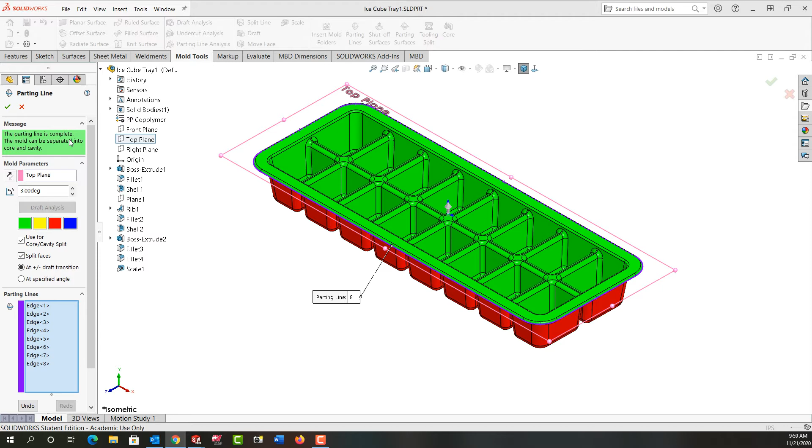Enabling the split faces will let SOLIDWORKS automatically split any straddle faces found during the draft analysis. So when we do this, it finds all these edges and it creates our parting line as we've seen before. So I'm going to say OK. We can now see our parting line shown in blue around the edge of the ice cube tray.

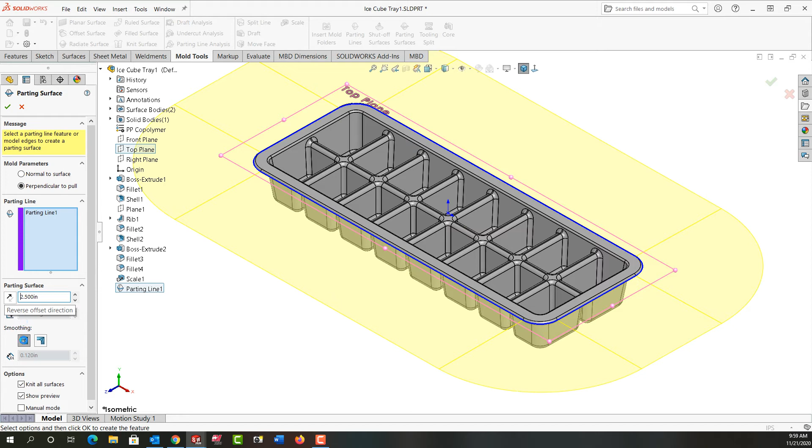And next, with the parting line highlighted, I'm going to come up here and tell it I want to make my parting surface. So it's going to grab that. I'm going to keep it perpendicular to the pull. I'm going to make it 2.5 inches with the corner sharp. I'll tell it to knit all the surfaces, and again I'll click OK.

Next, I want to insert the tooling split. So with the parting surface highlighted, I'm going to come up here and tell it I want to make a tooling split. I'll reselect this sketch. I'm going to look normal to it. I'm going to sketch a center point rectangle from the center here out.

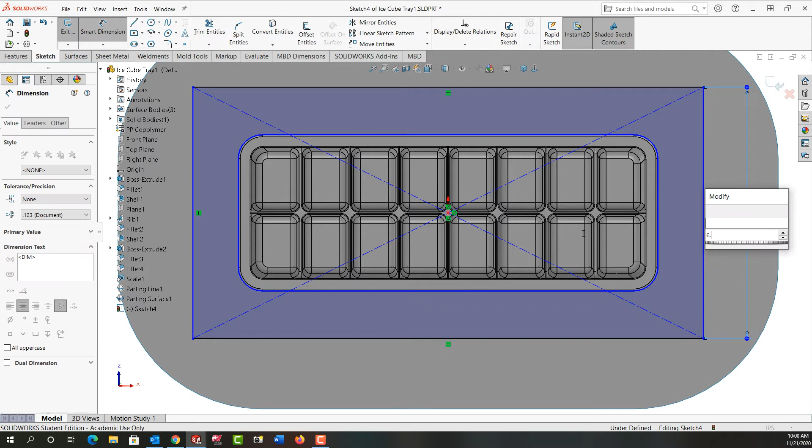We'll use mouse gestures to activate dimensioning. We'll make this side 6 inches. Zoom out a bit, just a bit more so it all fits, and I'll make this side 12 inches. And again, when making that parting surface, it just needs to be larger than whatever the rectangle for our tooling split block will be. We'll go back into the isometric view and exit the sketch.

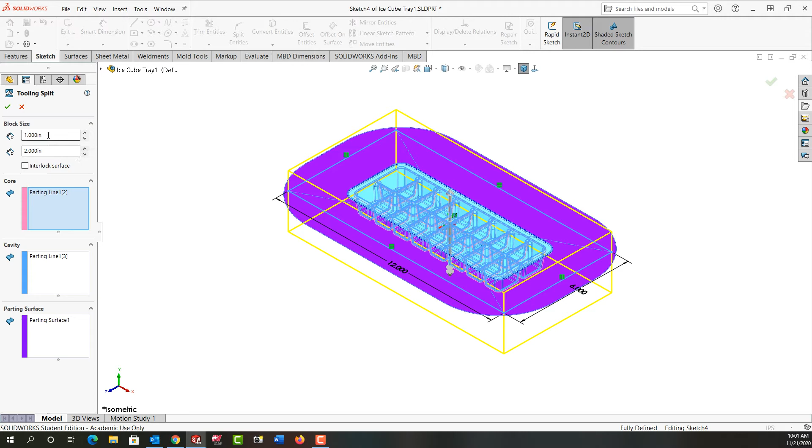I'm going to make the top block 1 inch and the bottom block 2, and I'm going to say OK. So next, I no longer need to see my surfaces. I'm just going to come up to the surface body folder, right-click on it, and tell it to hide all of those.

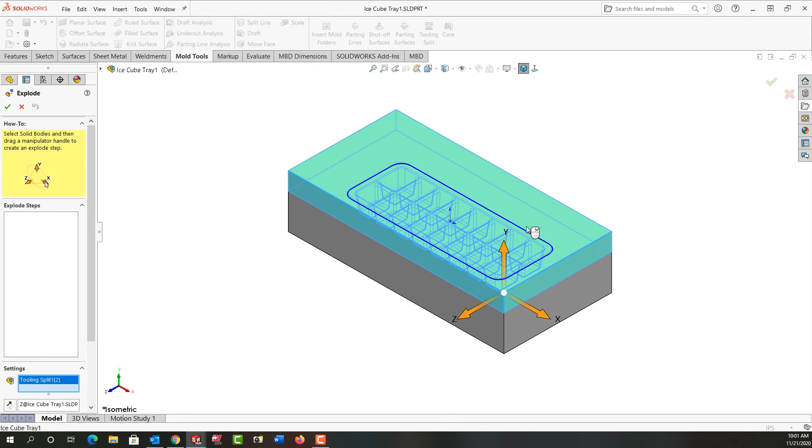And now I want to separate this so I can see the parts easily. So I'm going to select Insert, Exploded View. I'm going to click on the top, and I'm just going to drag it up so everything can be seen. That'll be good. And as soon as I release the mouse on a drag, it will be applied. So I'm going to select the bottom now. Again, I'm going to free drag this down, and I click, it's applied. Everything looks good. I have 2 steps. I'll say OK, and there's my exploded view.

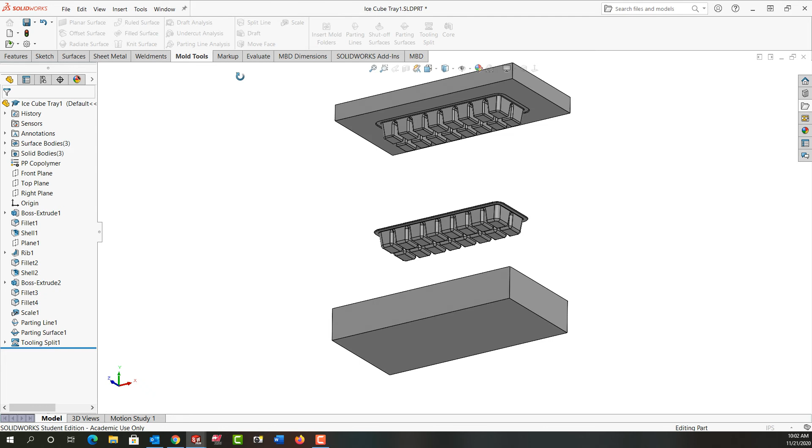So my final step is I want to assign a material to each of the blocks and again to the ice cube tray. So I'm going to expand the solid bodies. Now right now the ice cube tray itself, which is called parting line 1, does have a material assigned, but that's going to be removed as soon as I assign a material here, so I'll have to come back and redo it. So I'm going to start with the top part here.

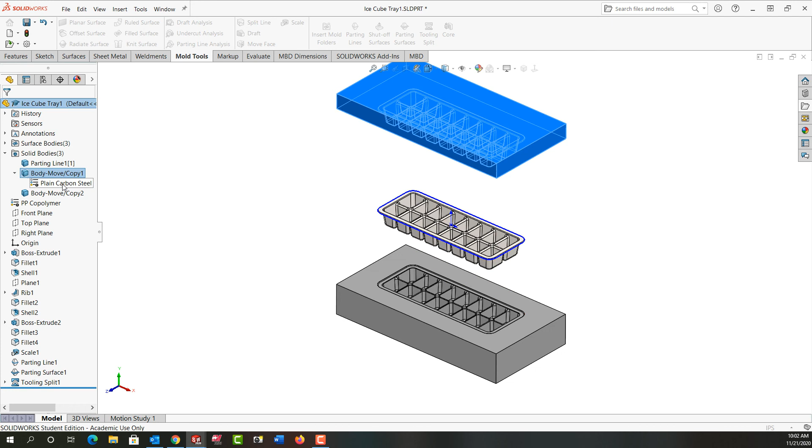I'm going to right click on it and I'm going to tell it to assign the material plain carbon steel. And you'll see right away that disappeared. So I'll expand this. Here we see plain carbon steel. I'll right click on this body, do the same thing. Select material, plain carbon steel.

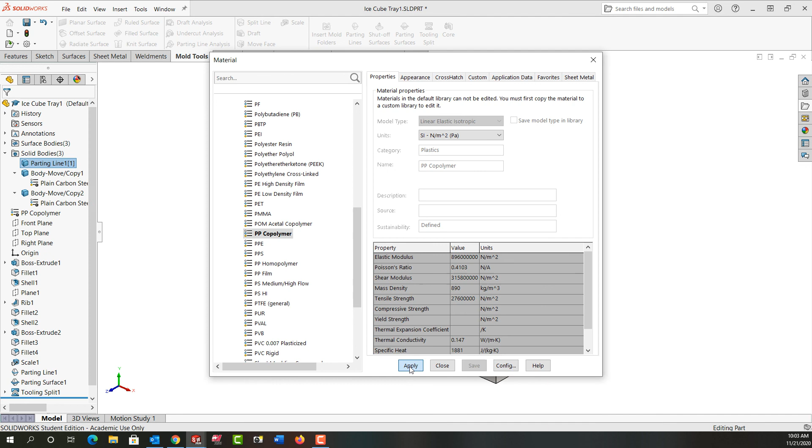So now we can see the material to these 2 blocks, and I have to come back up to this one, right click on it, tell it material, edit material. I'm going to go into plastics, so I'll minimize steel. And then I'm going to scroll down until I find the PP copolymer. Apply that. I'll close that. And now I've assigned a material to all 3 parts, and I have my tooling split. And the last thing I need to do is save my work.